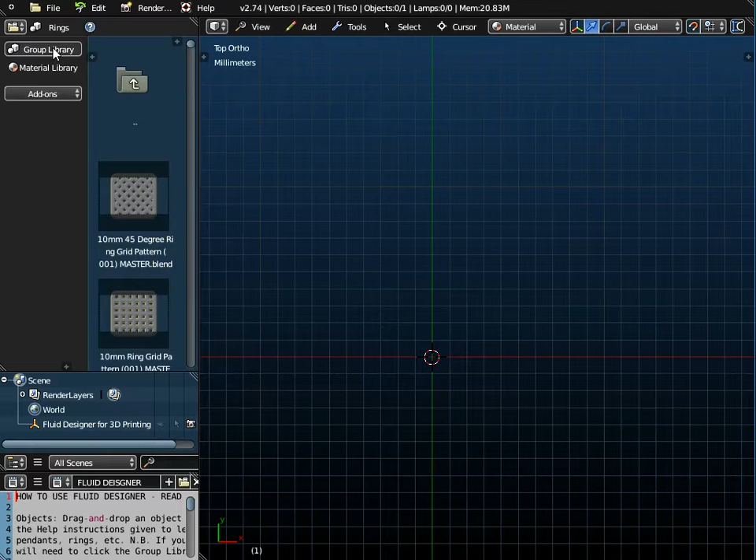Hello there. In this video I'm going to show you how you can create this stylized Saudi Arabic font earring using 3 characters. We're going to use Fluid Designer for 3D printing to do that. I'm going to use one of these ring connectors for the fish hook, and I'm going to use Arabic Saudi fonts, assuming we're going to use 3 characters: this one here, this one, and this character.

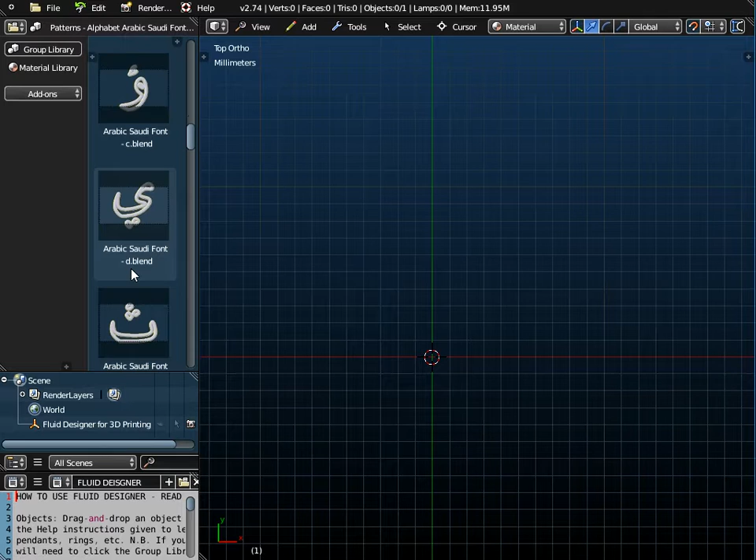So I'm going to drag and drop the first one onto the workspace there. I'm just scrolling the center mouse button to zoom back. I'll just switch on screencast key, so any key presses I make should be displayed down here.

We now want this character, so we do that by going to File and Append. Now we should already be in the Alphabet Arabic Saudi font folder, and we want this character next, and it's always the object that we append.

So we append that from the library, and I can just move that to the left and position it wherever I want it. And then I want the third character, which is going to be this one here, which is got a D.

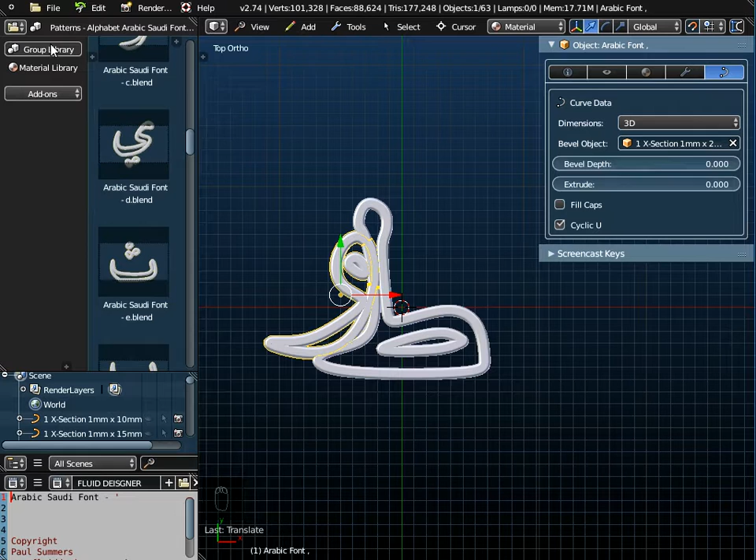So I'll go to File and Append. Just go up through the menu system into your Saudi fonts, select the character that you want, and append it from the library. Then you've just got to make sure that you position it in a suitable place so that there's some overlap. So I need some overlap for those characters and some overlap there.

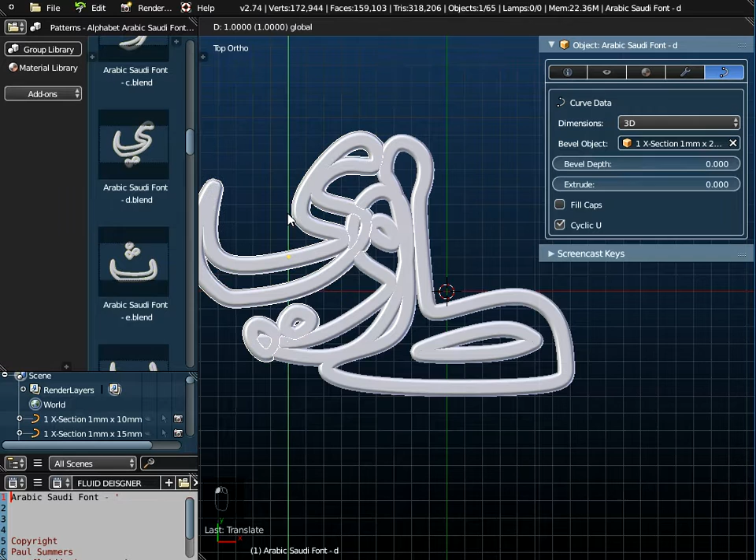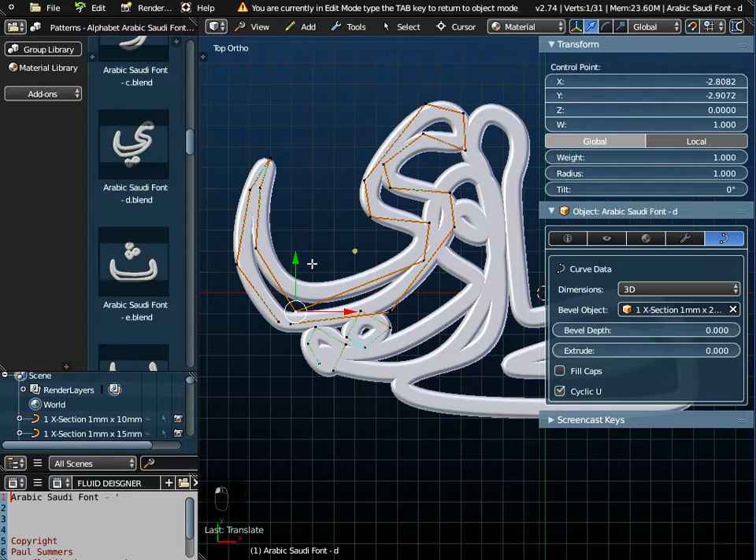It's not quite how I had it before, but that's all right. One thing I could do perhaps is press the tab key to go into edit mode. If I just perhaps pull those, I've highlighted a number of control points there. If I just pull them down a bit, perhaps I'll pull that down a little bit more so it looks a bit more like it did originally.

So we've just got overlap there, that's the key thing that we need to do. Now what I'm going to do is join these 3 objects together, so I'll just hold down the Shift key, highlight all 3 objects and just go to Tools, Object Tools, and join them.

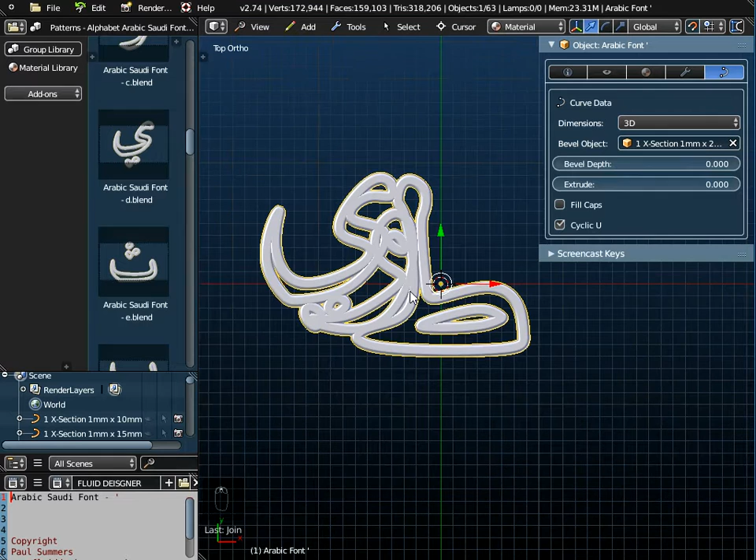Now a good idea, because we're making an earring, is to set the center of gravity of these objects. So we go to Tools, Object Tools, Origin, Origin to the geometry of the object, which is here. Then if we snap the selection, this is what's currently selected, to the cursor, it will put it in the center of the screen.

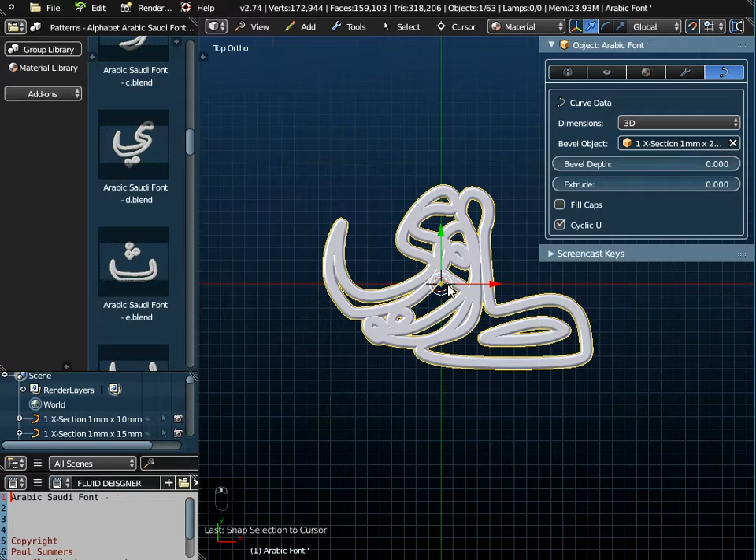Now what I need to do is add this wire connector, a ring. So I go to File and Append, just go up through the menu system till you get to the Groups folder. We want 3D Templates Connectors, that's where the wire connector is. And we just append that object from the library.

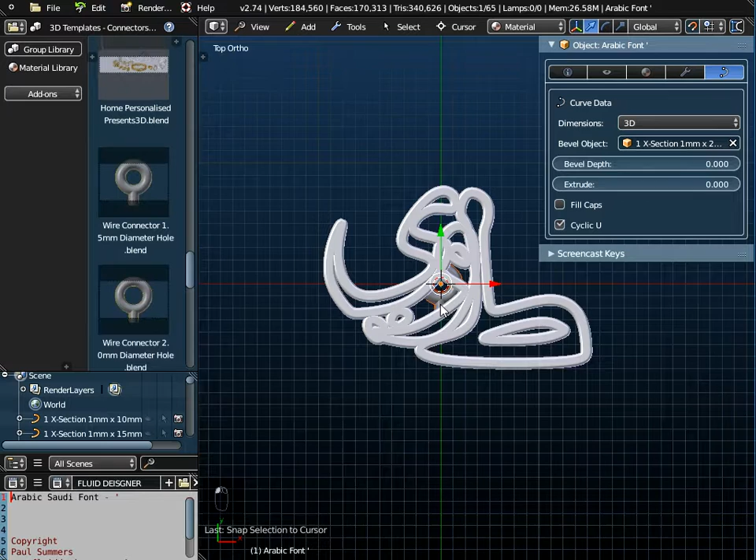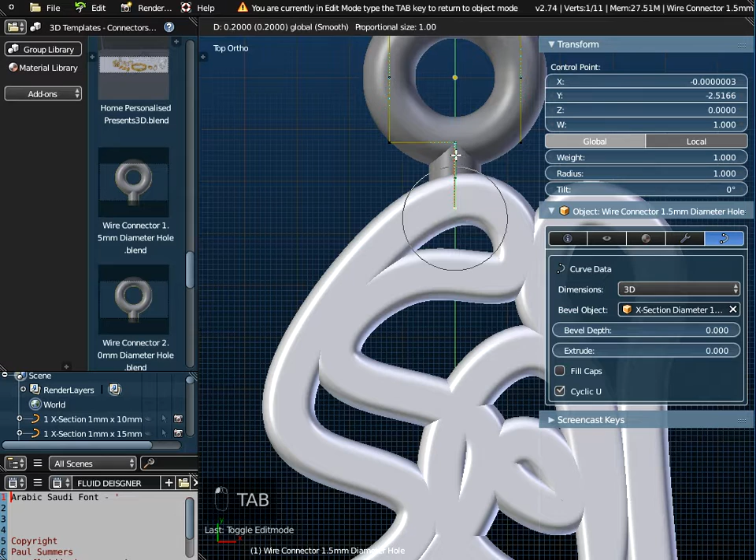So this is the folder where it was, make sure you've got it selected and just pull it up. Then we need to zoom in, and we could switch to wireframe just to see where it's positioned. If I just press the tab key I could pull that control point up a little bit, so make sure it's in the kind of middle there. And that's essentially it now.

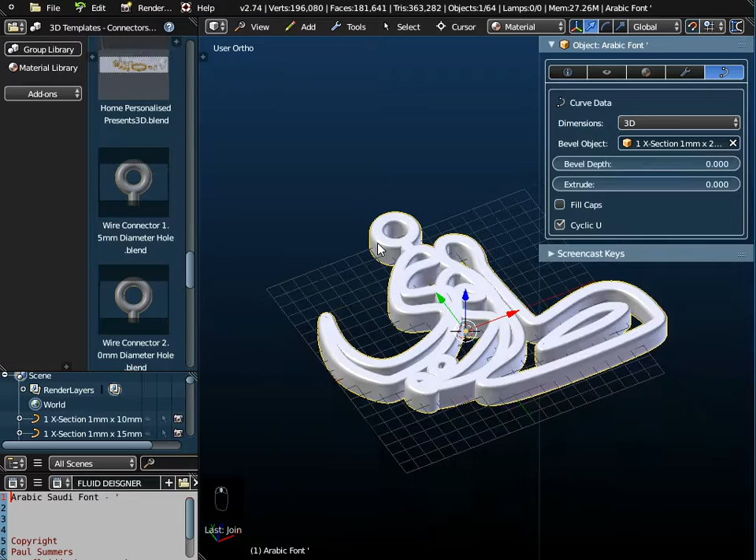If I, with the connector highlighted, hold down the Shift key and select the 3 fonts there and go to Tools, Object Tools, and Join, notice the connector takes on the thickness of the main body of the earring, which is defined over here. So it's actually 1mm by 2mm.

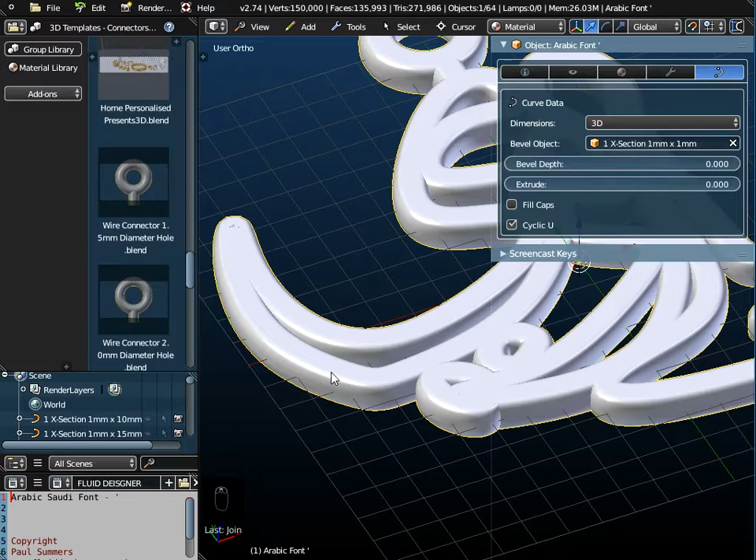Now that's probably going to make it a little bit too heavy to be an earring, so I would change that down to 1 by 1. This is a parametric smart object, so we can set any thickness we want. It was 1 by 2, which I think is a bit too thick for an earring, so I'm going to select 1 by 1. Then if I just go to View and Top View now, one other thing that I need to change is this bit down here.

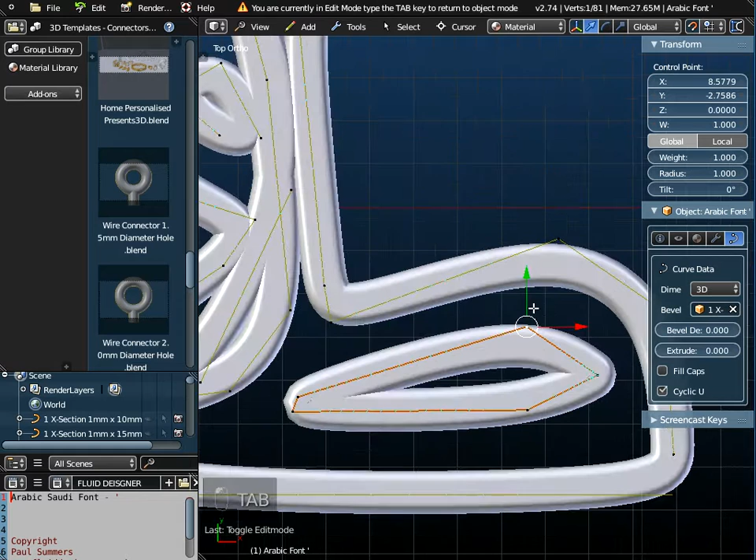That's going to fall out if we don't do something with it. So we'll just have to press the tab key to go into edit mode, and if I just pull the top of it up until it overlaps there, remember this is just a stylized font, that will now be one solid complete object.

So what we would do now is export it as an OBJ file. That's the format that I tend to use. I tend to save it to the desktop, and I saved it before as a personalised Saudi font earring. Then what you must do is go to Netfabb Basic, just run the repair procedure in Netfabb, and that will then be a 3D printable object.

You can see over here what the volume is. It's 0.16 centimeters cubed. In other words, if you just move the decimal point 1 to the right, 1.6 grams approximately is the weight in silver.

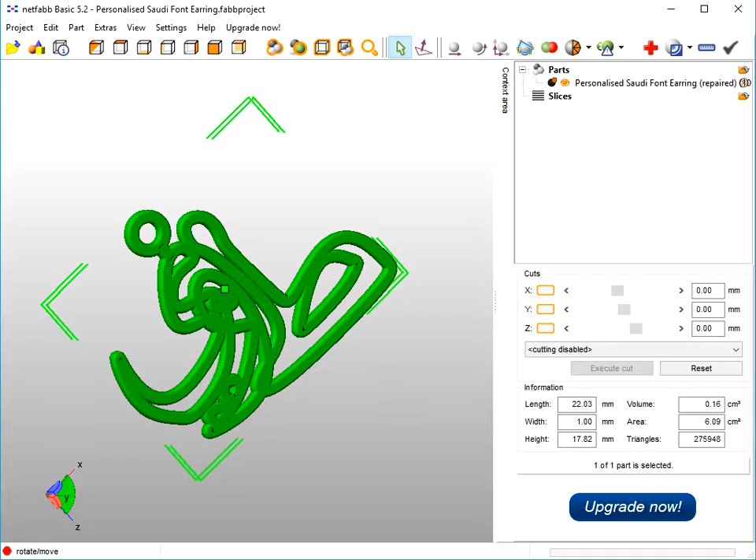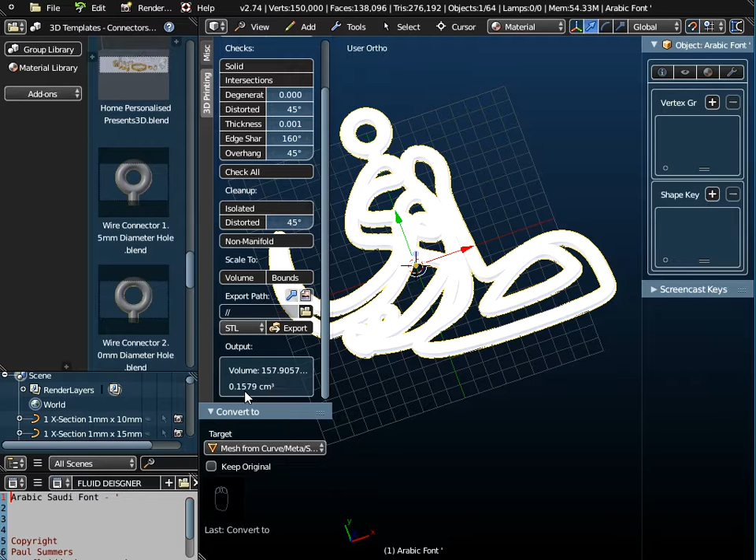You could have checked that in Fluid Designer. You can't check the volume of a curve. This object is currently a curve, so what you need to do is convert it to a mesh if you want to check it in Fluid Designer. Open up the toolbox, click on 3D printing and click volume, and down at the bottom you'll see again it's 0.16 centimeters cubed approximately, in other words 1.6 grams.

So that's how easy it is in Fluid Designer for 3D printing to combine a number of Saudi Arabic fonts together, put a ring connector at the top, and you've got yourself a 3D printable earring. Okay, thank you.